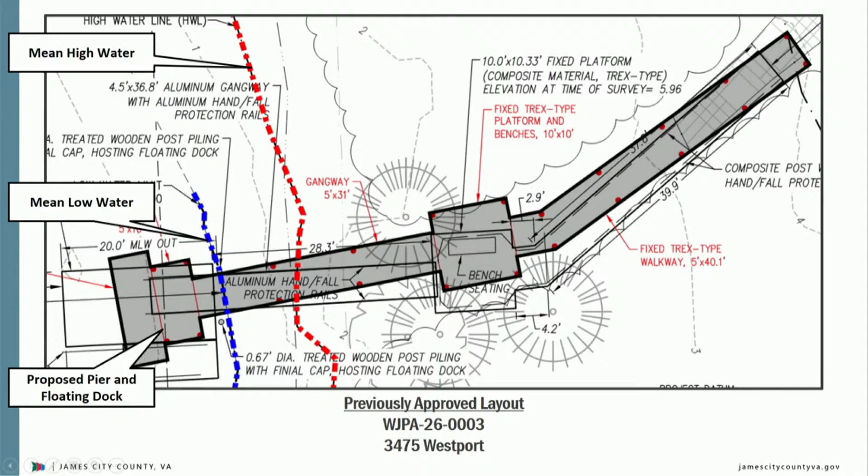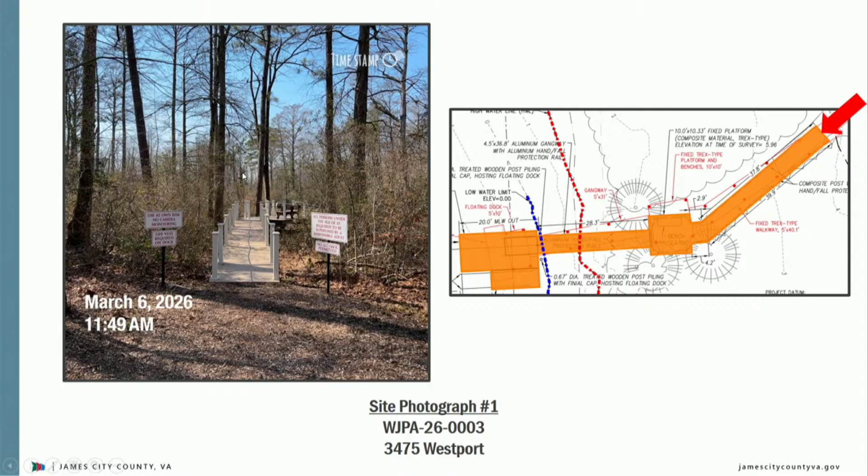This is the entryway, there's that gangway, moving a bit closer, railings extending outward, and then just a view from the corner kayak boat launch.

On February 1st, 2025, Virginia, as a Chesapeake Bay program partner, is committed to achieve a no net loss of wetlands. The following three criteria must be met: all reasonable mitigative efforts must be undertaken, and the proposal must demonstrate clearly its need to be in the wetlands, satisfying all three criteria.

However, compensation for the wetland loss is required. The committee is responsible for mitigation through offsite or out-of-kind mitigation within the same watershed. If compensation is required, it should be a condition of the permit, with no additional conditions. If you have any questions, I'd be happy to take them.

The as-built versus the portion that's within our jurisdiction shows a slight deviation. It's from the applicant.

President of Roth Environmental, 700 Prescott Circle, Newport News, Virginia, approved through the Wetland Board. The deviation that occurred was in order to not impact the three cypress trees there, in the same direction generally, as far as the gangway over the sliver that it hangs over, and then out beyond. Brad Reams reviewed this and they've recommended approval.

That increase in area out over. Any questions from the public regarding this? From the board? Chairman, this seems fairly straightforward, just a slight field adjustment for me.

Motion to adopt the resolution to grant the permit request for Wetlands Board case number WJPA. Mr. Roadley, yes. Mr. McElroy, yes. Mr. May, yes. Ms. Bowie, yes. Mr. O'Brien, yes. Motion passes.

Motion request. Ms. Grosjean: originally granted on June 14th, 2023. Staff's extension is to have the new expiration date coincide with that of WJPA. No objection from staff. I'll entertain a motion to approve the permit extension, case 013 at 5030 and 5032 River Drive. Mr. O'Brien, yes. Motion passes 5-0.

Ms. Grosjean, one more item: a modification to WJPA is requested regarding the Resource Protection Area Restoration Planting Plan, with the associated surety amount to be $5,200. If there are no objections, I'll entertain a motion for case 250011 at 7236 Otey. Ms. Bowie, yes. Mr. O'Brien, yes. Motion passes 5-0.

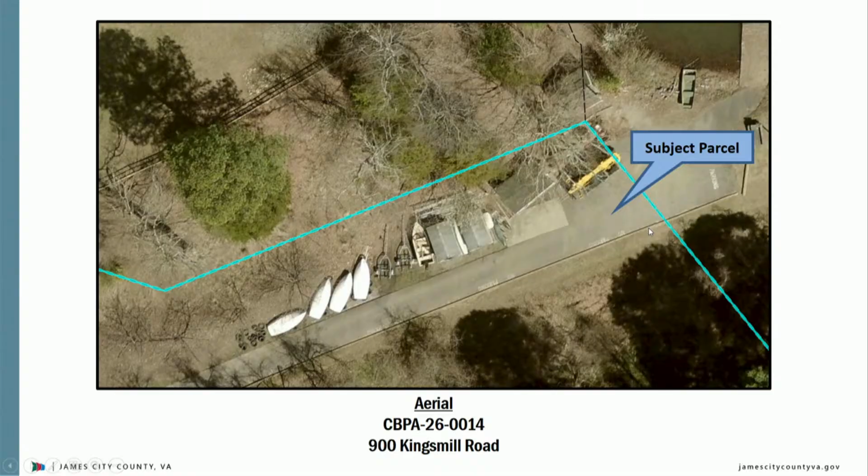Kingsmill Road. Amanda, Mr. Robert Thompson of William and Mary, installation of 2 sheds located at 900 Kingsmill Road within the Kingsmill subdivision, approved in 2004. Looking closer at the aerial project area, the total lot size of this property is 191.39 acres, of which 20% is located within the RPA. Impacts associated with this proposal equate to 2 understory trees and 3 shrubs.

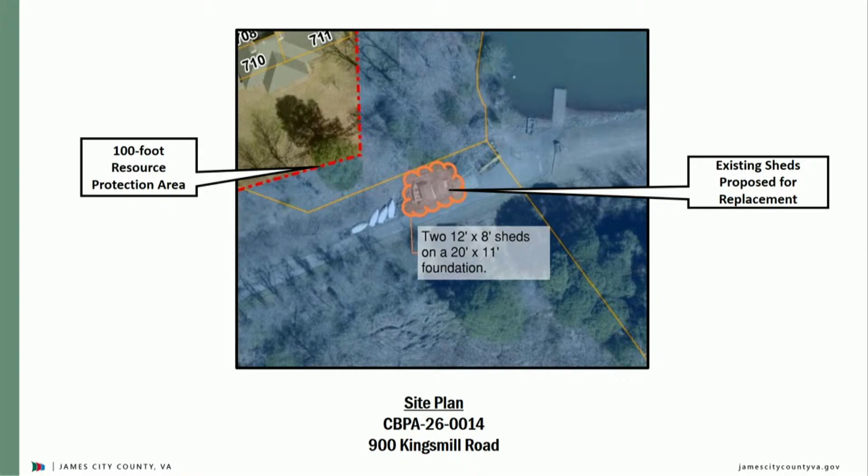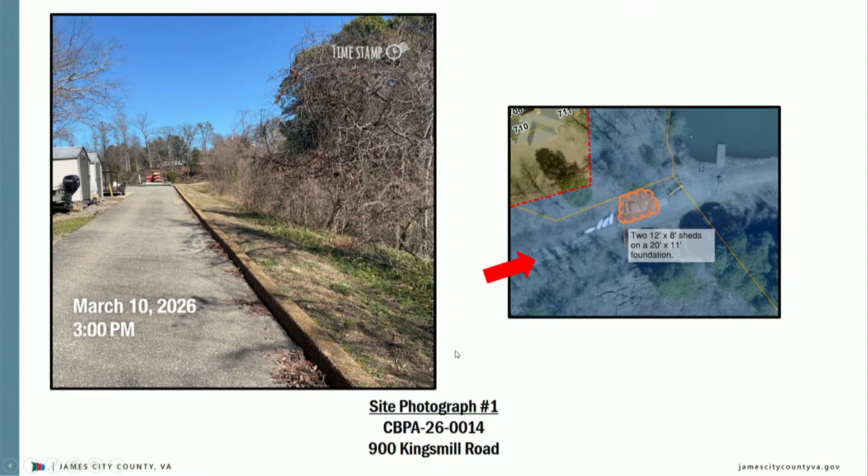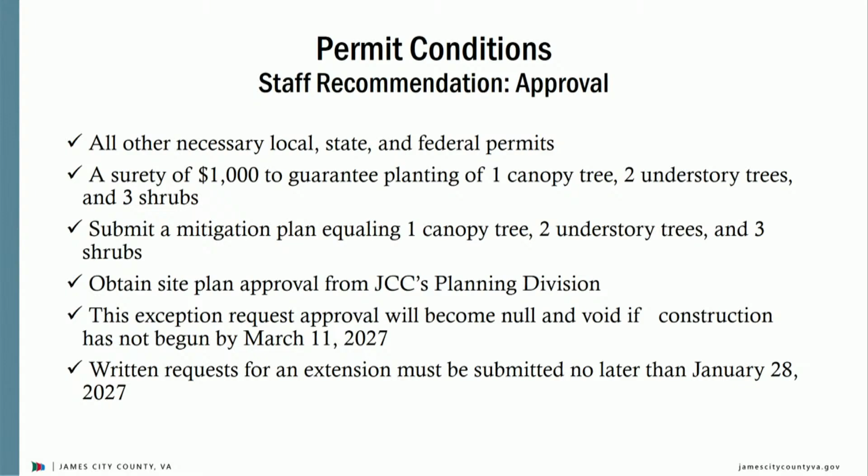Hearing none, I'll pull it back to the board. Any further discussion? Close the public hearing. Do I have a motion?

Motion regarding case 26-0014 at 900 Kingsmill Road. Mr. Wilson? Yes. Ms. Roadley? Yes. Motion passes 5-0.

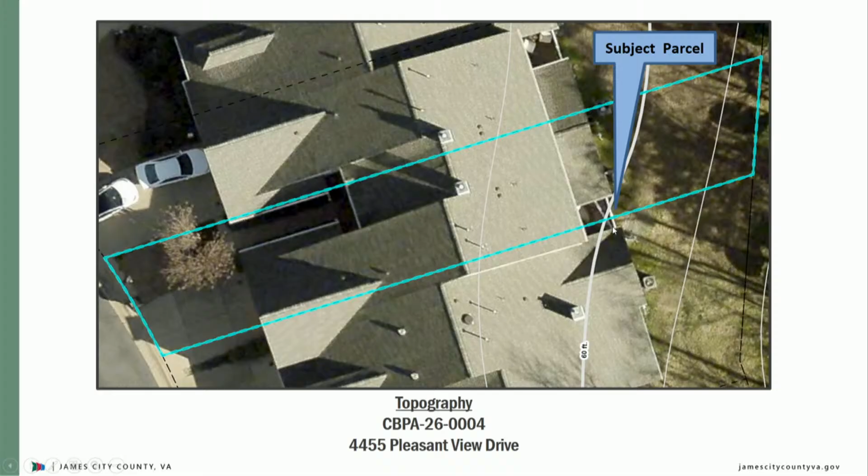Next item on the agenda is CBPA 26-0004, a motion for encroachments into the RPA buffer for the extension of a deck located at 4455 Pleasant View Drive. Subject parcel shown in blue, which we will zoom in on. As you can see, it slopes off to the rear right portion of the property in the landward buffer.

An 80 square foot raised deck at the back of the home will be extended by an additional 328 square feet. Required mitigation for this amount of impervious impact equals 1 planting unit of physical plantings.

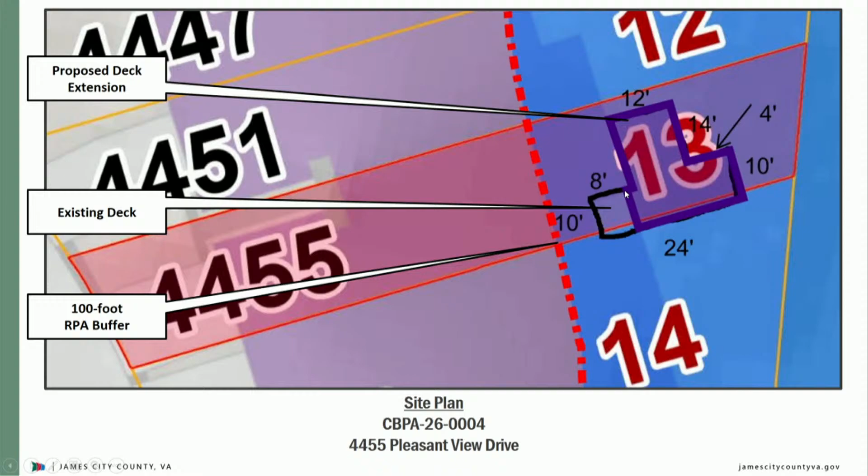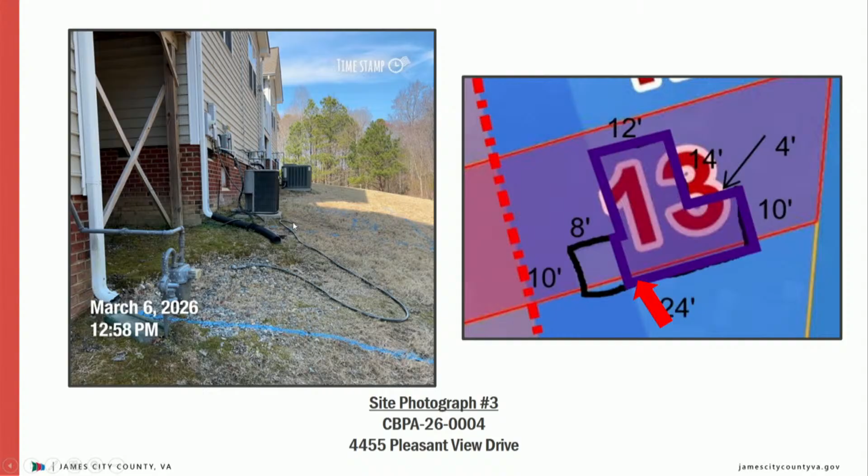The proposal does not encroach on anyone else's property, which they don't plan on doing. Moving through the current site photos here, showing the property line, then moving closer in to where it's going to connect, over to the proposed deck extension.

Staff has evaluated the construction of a deck as accessory in nature. The board may grant exceptions to section 23-7 if the proposed development meets requirements. Staff recommends approval for this exception request, and if the board permits, the applicant must obtain all necessary permits and submit a payment of $500. This exception request approval will become null and void if construction is not begun by March 11, 2027, the expiration date. Happy to take questions at this time.

Any questions for staff? Regarding the surfacing, it's some sort of crushed gravel or mulch — we're kind of leaving it vague. Anything that's disturbed has to be permanently stabilized with either of those things.

Is there anyone here to address the board? Please state your name and address for the record.

Thank you for your time and consideration and for all your important work protecting the bay. The plan is to pull the deck in 1 foot inside the property line on both sides, to take care not to cause any disturbance, as little as possible, and to take care with the gutter and the water.

For this unit, there are decks that do extend off of the back of the property. The neighboring property owner works in urban and environmental planning, and she's just expressing her perspective. Thank you very much.

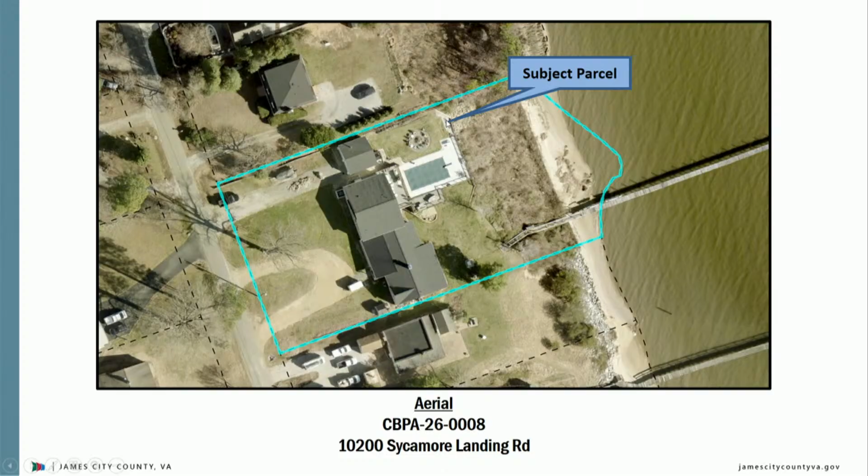Proposal involves a wall behind the existing dwelling to stabilize the yard above, with an existing retained area within the 100-foot RPA. Required mitigation for this amount would satisfy county mitigation requirements. The previously existing wall is proposed to be replaced.

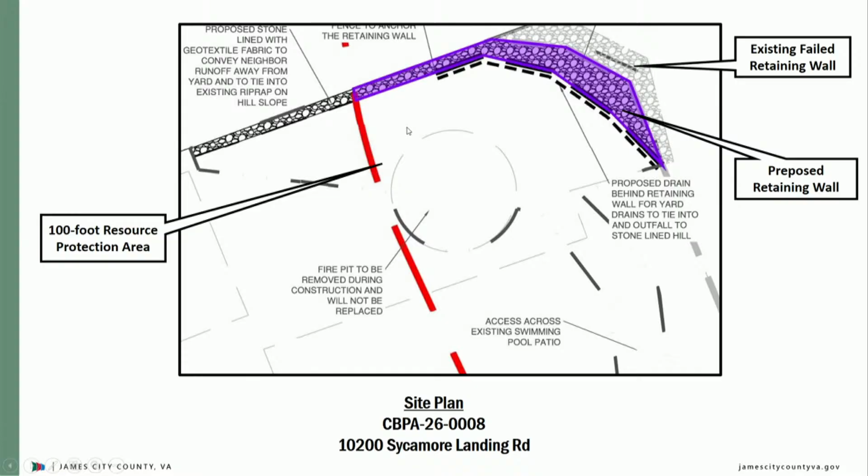Not reconstructed — this is the proposal section of the retaining wall, showing the existing structure here and the new construction here.

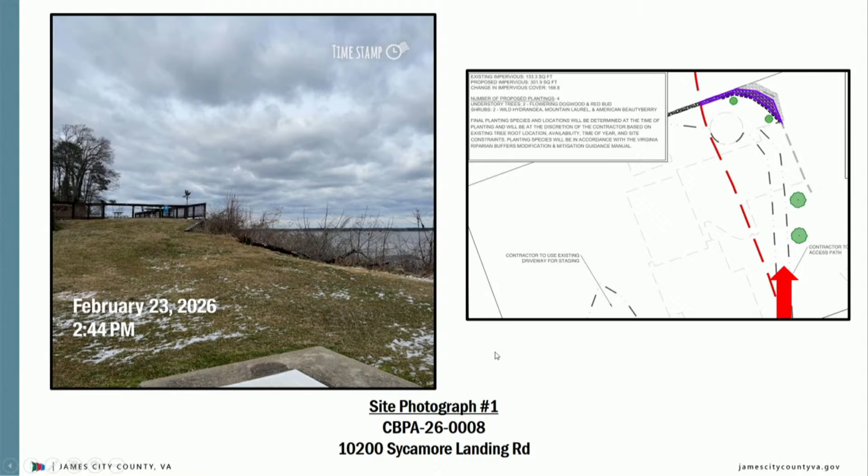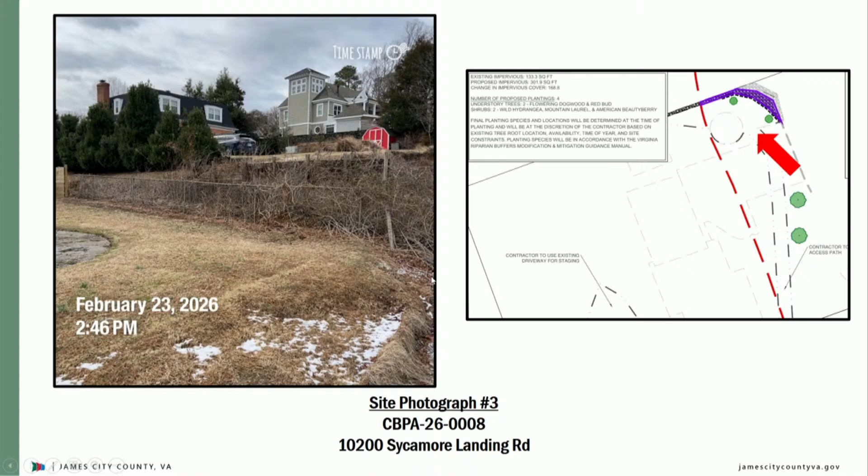Site photos show where the 2 understory trees are proposed, the previously existing fire pit, and then looking back towards the beginning of the retaining wall, along this fence and around this area, the existing failed retaining wall, and then the slope behind it.

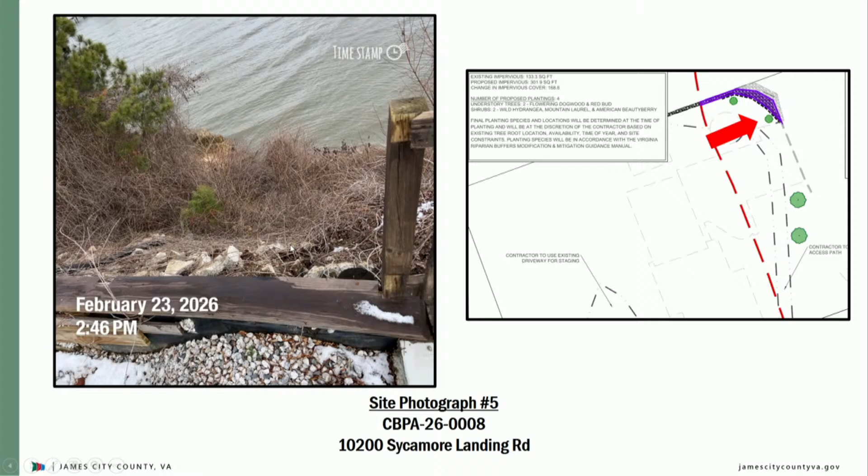Staff has evaluated the application and exception request for the construction of a retaining wall. This application meets the ordinance conditions in sections 23-11 and 23-14 and should be heard by the board because the construction of a retaining wall is considered accessory in nature.

The board may grant exceptions to section 23-7 if the application meets the following 5 conditions, which you have before you. Staff has reviewed the application and exception request and has determined the impacts associated with the proposal to be minor for the proposed development.

Staff recommends approval for this exception request, and if the board wishes to approve, staff recommends the following conditions be incorporated into the approval: the applicant must obtain all other necessary federal, state, and local permits as required for the project.

The applicant must submit a surety of $500, in a form acceptable to the James City County Attorney's Office, to guarantee the mitigation plan equaling 2 understory trees and 2 shrubs. This exception request approval will become null and void if construction has not begun by March 11th, 2027.

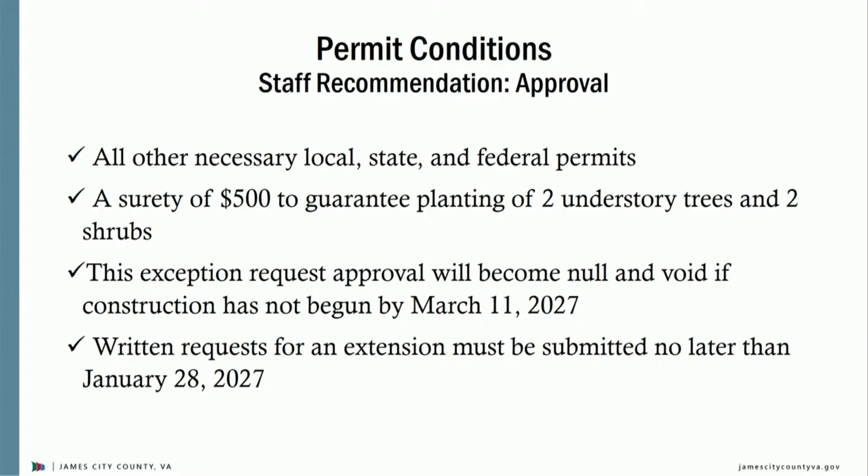Written requests for an extension to an exception must be submitted to the SRP division no later than January 28th, 2027, 6 weeks prior to the expiration date. Happy to take any questions at this time.

Questions for staff? It was indicated the existing retaining wall is going to stay there — does that provide any benefit? I will defer that question to the applicant. Other questions for staff? Could you go back to the cross-section drawing of the proposed structure?

They're retaining the existing structure; the soil will be removed and replaced, or removed and left out of there. That's for the applicant to address.

Okay, and these are horizontal alignment of the boards for the retaining wall, as opposed to being driven? Okay, that's for the applicant. I don't have any more questions then.

Thank you. With that, I'll open the public hearing. Would the applicant care to address the board?

Hello, Karen Hall, 7501 Mill Trail Road, Charles City, Virginia. Can you repeat your questions? I'm happy to answer them.

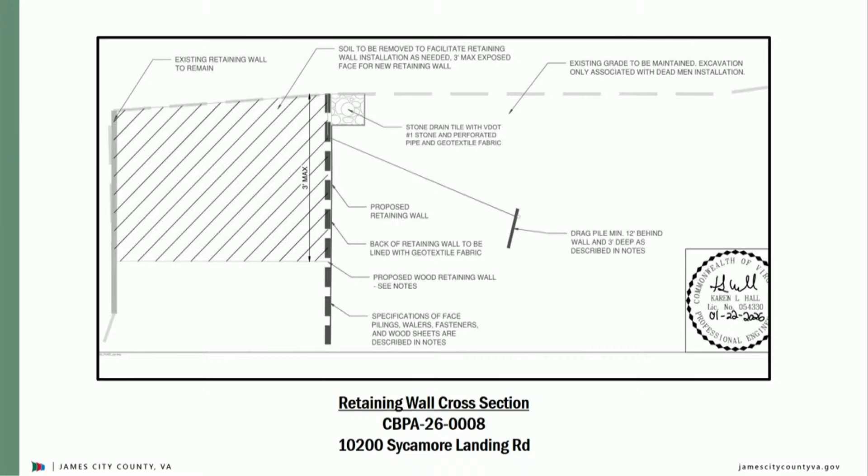Sure, so is the fill that's being removed going to be replaced? It's not anticipated to be replaced. The reason the existing retaining wall is to remain is you saw how sheer that slope is, just to avoid any disturbance on that side of the wall and pulling anything out to disturb it further was the intent, but the existing wall has failed. So will that area just be revegetated?

I think I showed proposed riprap on the downslope side of the proposed wall, so even though that existing retaining wall has failed, there'll be nothing but riprap cover there to facilitate any drainage that comes through there.

And then the structural alignment of the boards, are they horizontal or vertical? They'll be vertically driven into the soil. Okay, and you can see on the profile that the boards go further down into the soil there, so.

And is the surface drain, you think, enough to keep the hydraulic head from impacting the wall? I think so. We evaluated a drop inlet, but it seemed excessive for what was going on there.

Any further questions? Thank you very much. Would anybody else care to address the board on this matter? With that, I will pull the discussion back to the board.

Seems to have an issue that they're wrestling with. The stone does make the area of encroachment a little bit wider as it's shown on the plan view, which helps clarify for me why we were showing such a large area, but that's all behind where the existing wall is now, correct? Yeah.

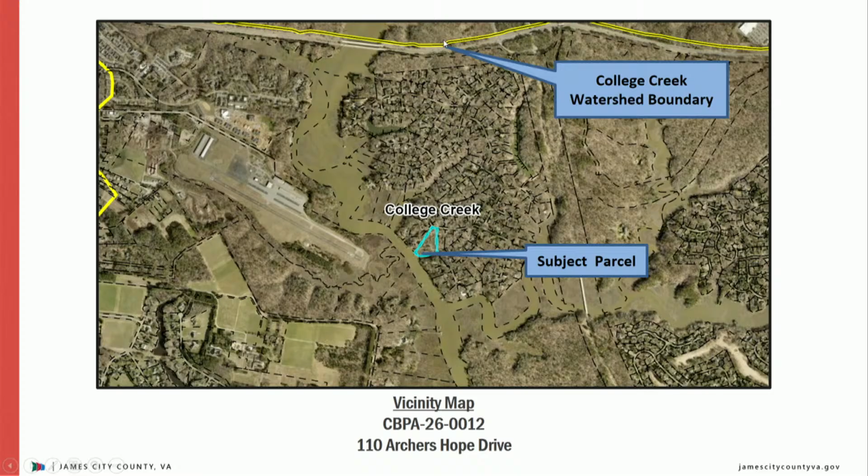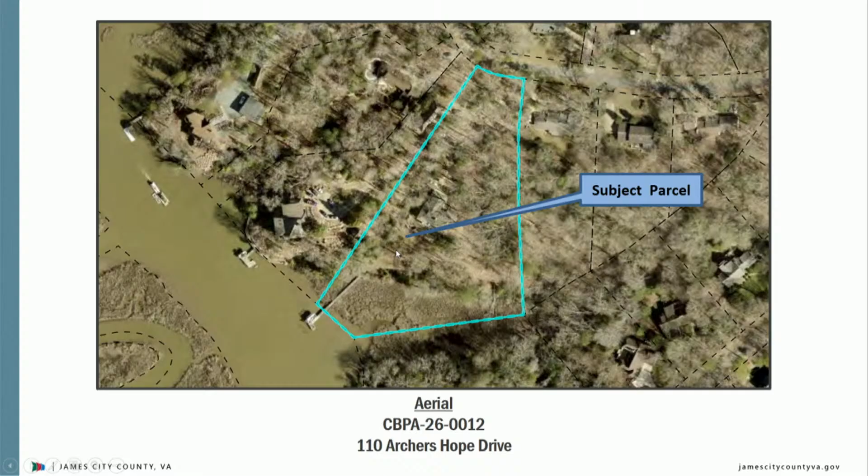We have that subject parcel, as usual, outlined in blue, along with that watershed boundary outlined in yellow. Moving further into recent aerial photography, you can see an existing dock, and this is the area of focus for the proposal, along with the existing topography, as you can see it kind of just slowly slopes back towards the rear of the property, towards the water.

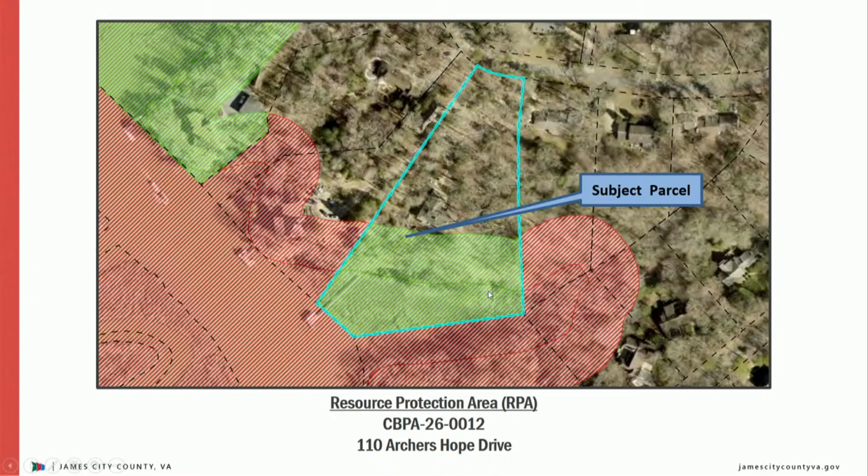And then the current RPA buffer, along with the FEMA floodplain, which is zone AE with a base flood elevation of 7 feet. The total lot size of this property is 3.056 acres, of which 52% is located within the RPA. The parcel was platted in 1973, prior to the adoption of the Chesapeake Bay Ordinance in 1990.

The applicants are proposing to construct 2 retaining walls, stairs, and a walkway. Total impacts to the RPA associated with this proposal equate to 411 square feet of impacts in the landward 100-foot RPA, and 395 square feet of impacts in the seaward 50-foot RPA, for a total of 806 square feet of total impacts to the RPA.

Required mitigation for this amount of impervious impacts equals 2 planting units, or 2 canopy trees, 4 understory trees, and 6 shrubs. The applicants have proposed a mitigation plan equaling 2 understory trees and 55 shrubs. This exceeds the county's mitigation requirements.

So we have the site plan here before you. All of the proposed work to take place within the 100-foot landward buffer is outlined in purple. If you look at these little dots, they're a landscape feature, basically big boulders. We wanted to account for those impervious impacts, as well as the retaining wall, along with the stairs and walkway, which continues into the seaward RPA buffer outlined in orange, with stepstones that go up to that existing dock.

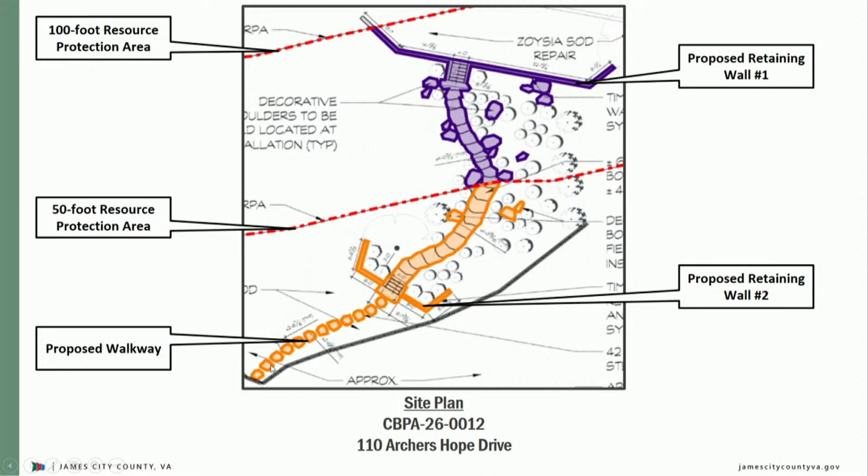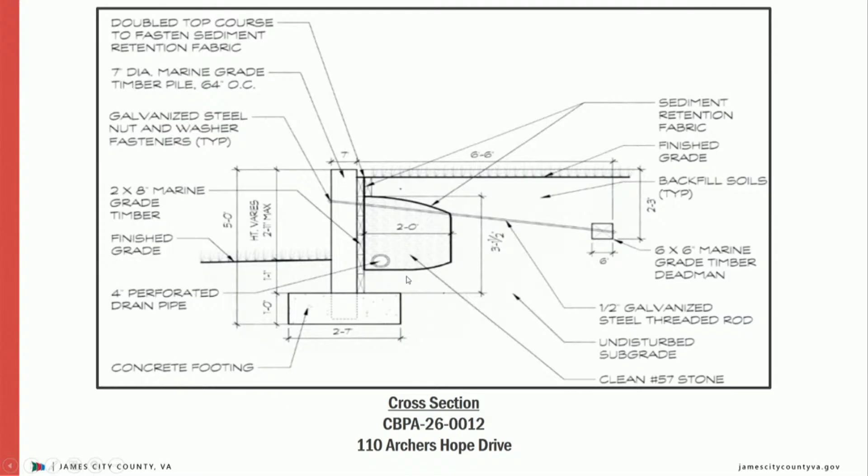This is a cross-section of those proposed retaining walls. We have a deadman tieback here, with stabilization proposed along the top and bottom of both retaining walls. And then the mitigation plan with those 2 understory trees along with various native shrubs, all shown in green here.

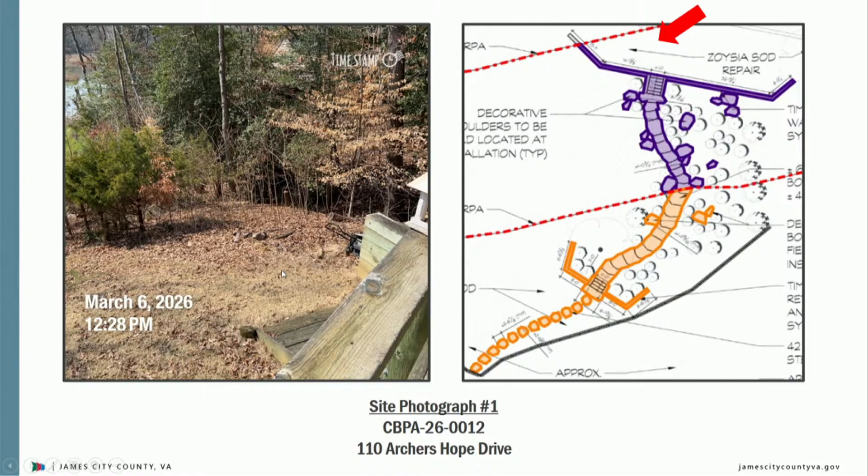And then just some recent site photography showing existing conditions on the site. There is a 3rd existing retaining wall towards the top of the house, cut off right about here in this screenshot. So standing from the top of that, just to give you an idea of where that 100-foot RPA buffer starts, as well as the extent of that first proposed retaining wall, and then moving down, looking at the alignment of where that first retaining wall will go.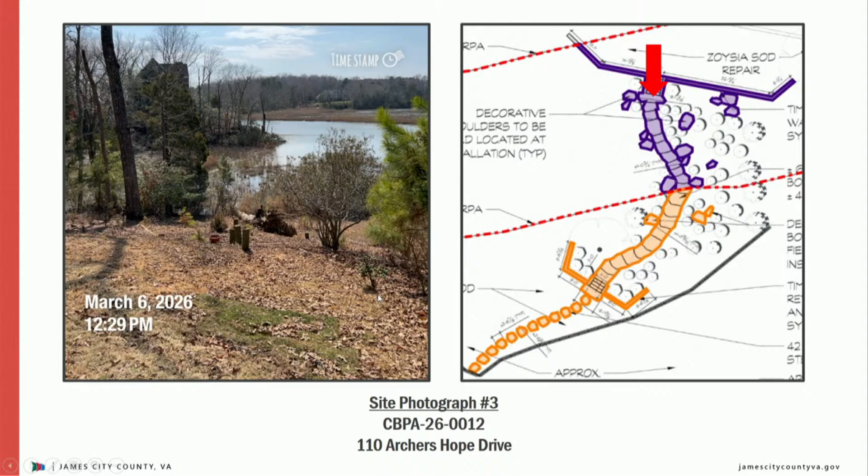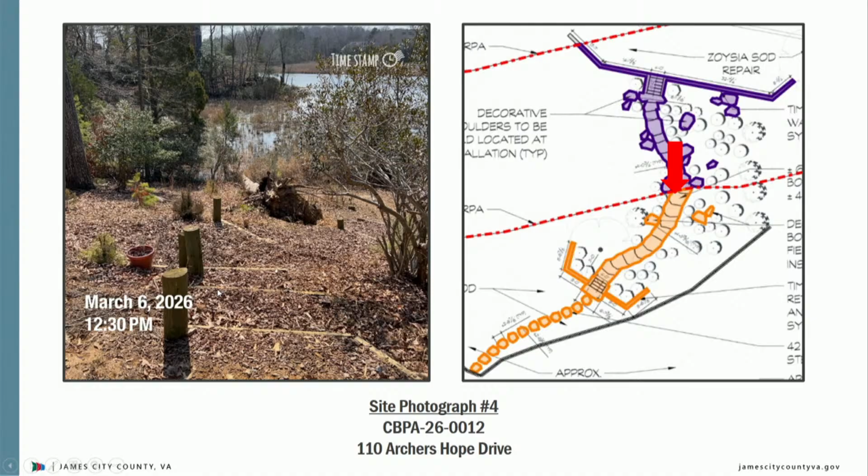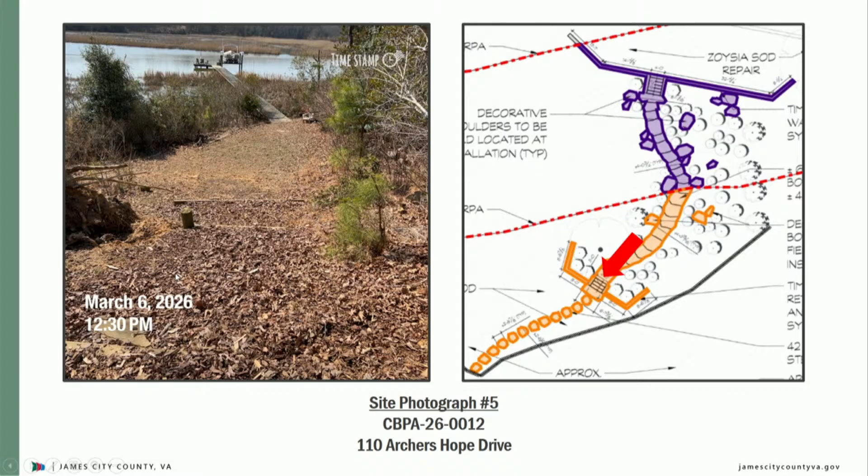And it gives you an idea of the slope on the property. Looking more directly towards the water, following that proposed path, there's sort of an existing one, but as we go through these photos, you'll see the existing condition of it. Just moving closer on those stairs, following the current proposed pathway, we're about to go into the 50 seaward here, and then moving further in, there's that existing dock with the stepstones that'll be proposed here. This is about where that second retaining wall in orange will be placed.

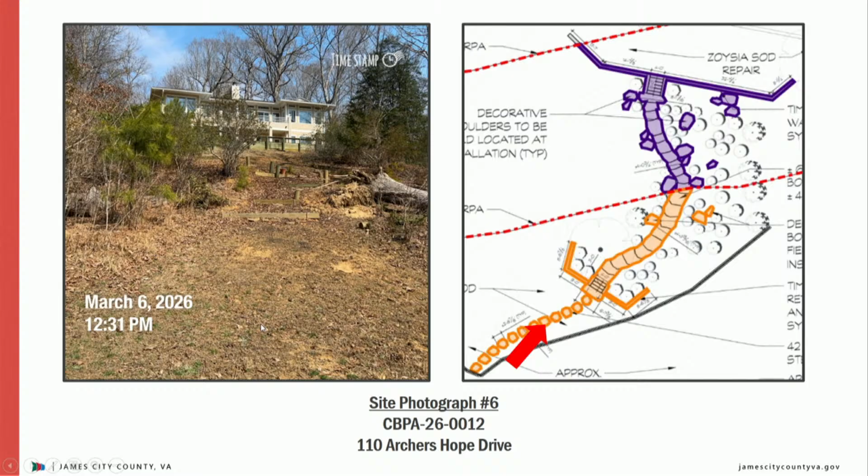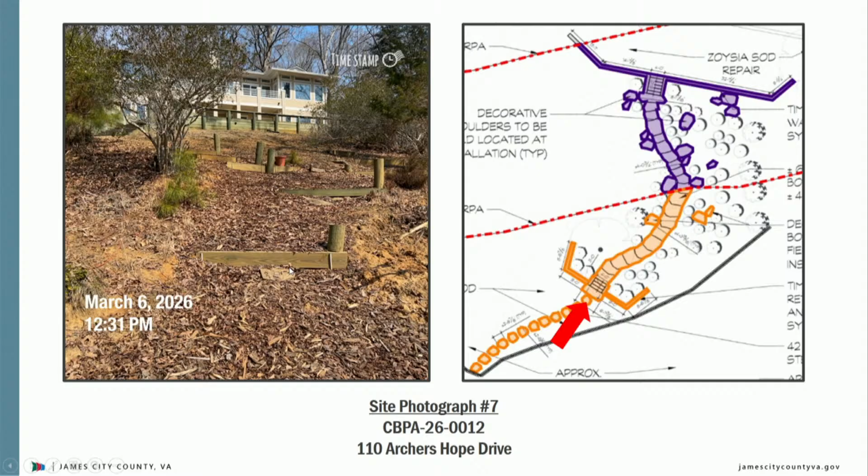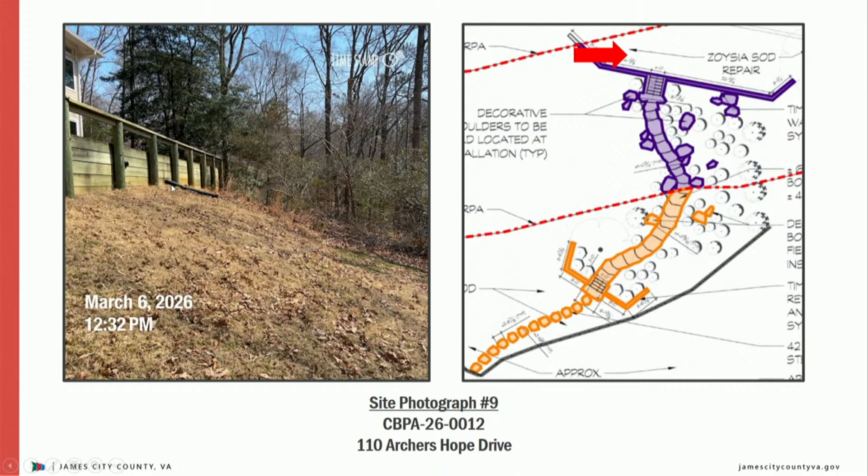Staff has evaluated the application and exception request for the construction of 2 retaining walls, stairs, and a walkway. This application meets the ordinance conditions in sections 23-11 and 23-14 and should be heard by the board because the construction of retaining walls, stairs, and a walkway is accessory in nature. The board may grant exceptions to section 23-7 if the application meets the following 5 conditions outlined before you.

Staff has reviewed the application and exception request and has determined the impacts associated with the proposal to be moderate for the proposed development. Staff recommends approval for this exception request, and if the board wishes to approve that request, staff recommends the following conditions be incorporated into the approval.

The applicants must obtain all other necessary federal, state, and local permits as required for the project. The applicants must submit a surety of $3,750 in a form acceptable to the James City County Attorney's Office to guarantee the mitigation plan equaling 2 understory trees and 55 shrubs. This exception request approval will become null and void if construction is not begun by March 11th, 2027, and written requests for an extension must be submitted to the SRP division no later than January 28th, 2027, which is 6 weeks prior to the expiration date.

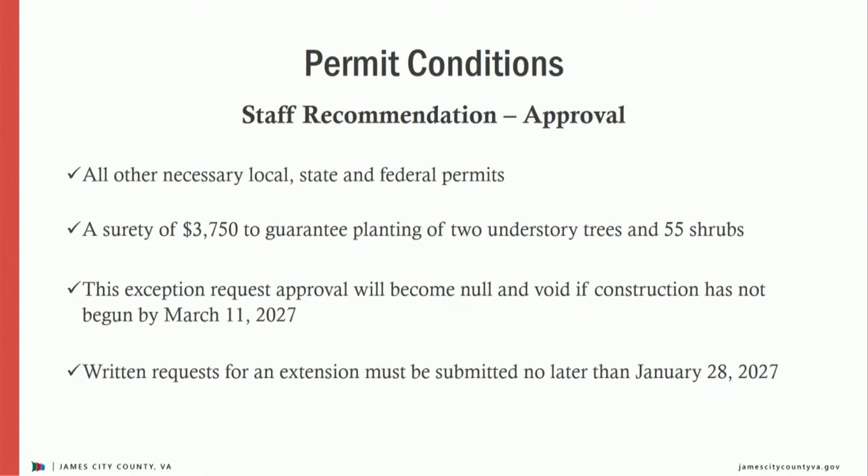If you have any questions, I'd be happy to take them at this time. Questions for staff?

Fairly well presented, thank you. I'll open the public hearing. Would the applicant care to address the board?

How you guys doing? Good. Please state your name and address for the record.

My name is Mitch Foose. I'm the owner of the King's Garden, and this is Sarah Lamb, she's the designer. Basically the hillside is eroding, it's all open soil, so we're proposing retention walls to lessen the slope and mitigate the erosion. We're trying to create a pathway for the owners to safely get down from their house to the dock. We're going to be doing a lot of mitigation planting to hold the hillside down, along with the inclusion of boulders so that those can be dug into the hill and act as stabilization as well.

In addition to the stepping stones, is there mulch applied as well? I noticed they had some mulch down now. So there will be mulch applied in the middle of the 3 sections. The top section above the first retention wall is going to be zoysia sod, and the lower section where the stepping stones go from the lower retention wall to the dock is also going to be zoysia sod.

What's the elevation of the retaining walls? Less than 3 feet on the top one, just a little under 3 feet, and the bottom one should be about 2.5 feet. Step down from those, from the walkway, through some steps, or just?

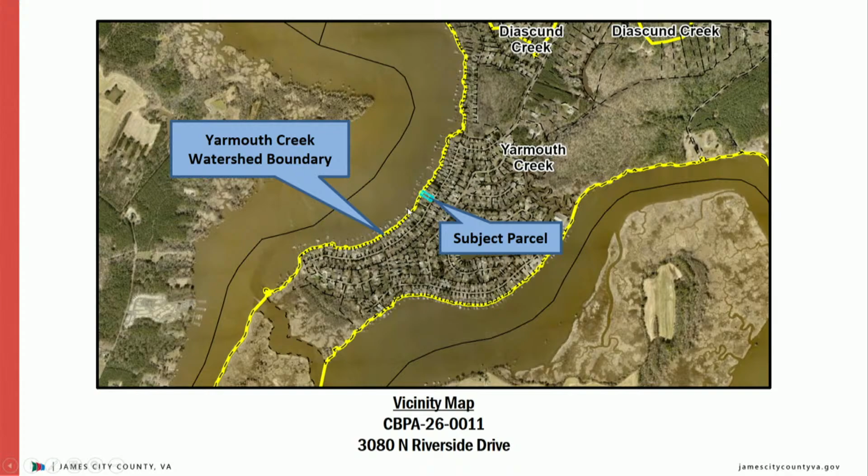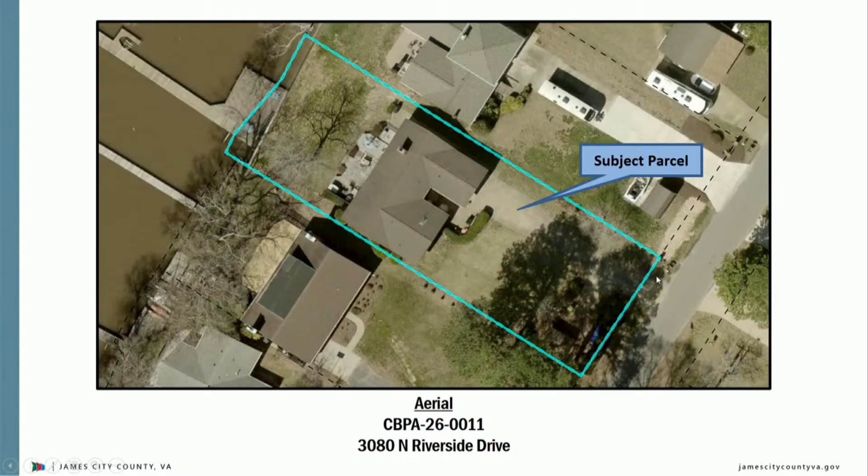The total lot size of this property is 0.395 acres, of which 48% is located within the RPA. The applicant is proposing to construct an in-ground pool and is proposing to remove existing decks and a pump house structure within the RPA. These existing structures equate to approximately 764 square feet of existing impervious within the 50-foot landward RPA and approximately 80 square feet of existing impervious within the 50-foot seaward RPA. The applicant is proposing to construct a 1,440 square foot in-ground pool and pool deck behind the existing dwelling where the existing decks are currently located.

Total new impacts to the RPA associated with this proposal equate to approximately 116 square feet of new impacts to the landward 50-foot RPA, approximately 496 square feet of new impacts to the seaward 50-foot RPA, for an approximate total of 612 square feet of new impacts to the RPA. Required mitigation for this amount of impervious impacts equals 1.5 planting units: 1 canopy tree, 2 understory trees, and 9 shrubs. The applicant has proposed a mitigation plan of 2 canopy trees, 4 understory trees, and 6 shrubs, thus exceeding the county's mitigation requirements.

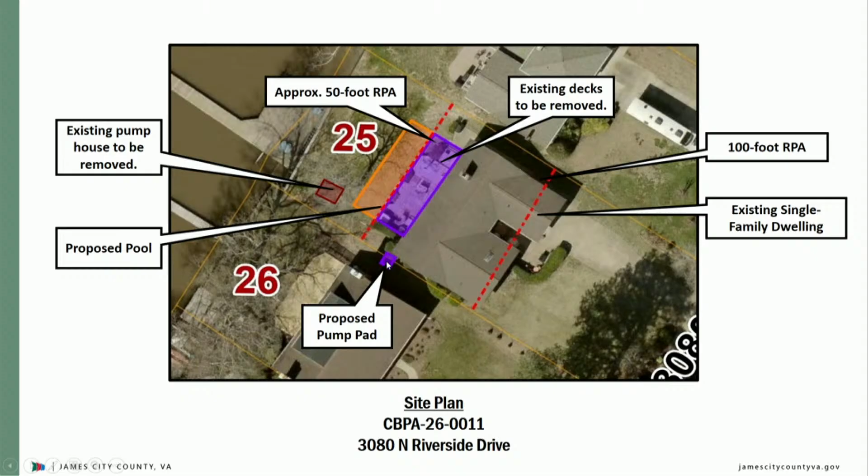Here we have a site plan showing the limits of the proposed pool and deck. This area here in purple includes the existing deck and where the new impervious will be proposed in this area, and then it will extend into the 50 seaward here. This is the existing pump house that is proposed for removal and the proposed pump pad for the pool. This was the submitted mitigation plan with the mitigation plantings on the side of the property line.

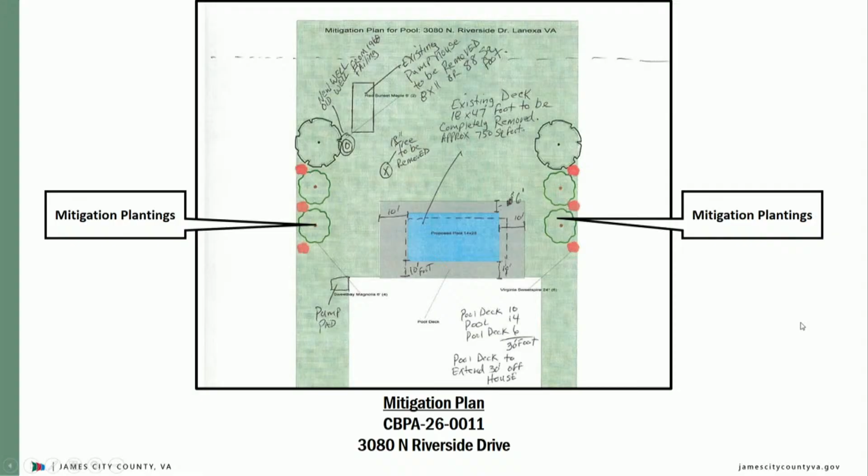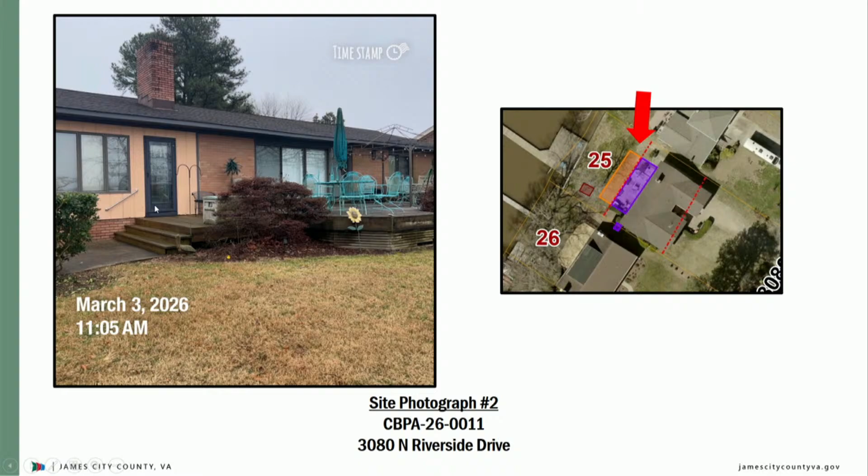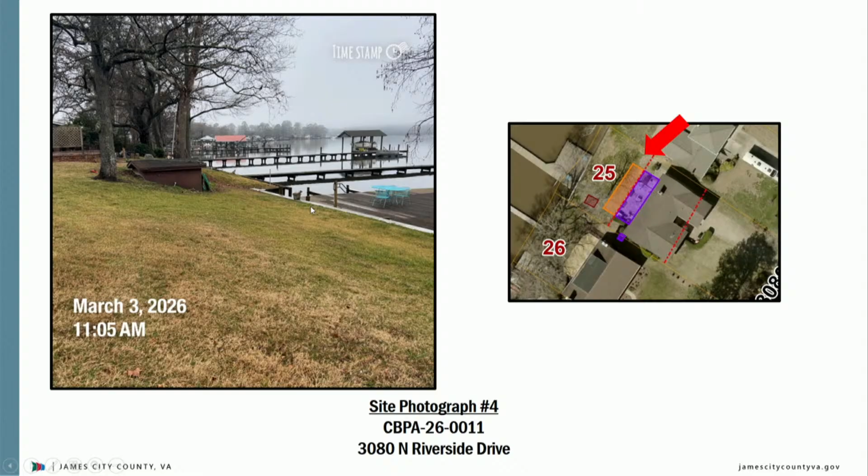Photographs of the site. Here we have the side yard going around to the back, the existing decks, showing the rest of the existing decks, and then the area where the pool is proposed. I have some markers here and here showing the limits of the proposed pool and pool deck. And then looking back downslope towards the water, and looking back towards the existing deck and the limits of the proposed pool.

Staff has evaluated the application and exception request for the construction of an in-ground pool. This application meets the ordinance conditions in sections 23-11 and 23-14 and should be heard by the board because the construction of a pool is considered accessory in nature. The board may grant exceptions to section 23-7 if the application meets the following 5 conditions, which you have before you.

Staff has reviewed the application and exception request and has determined the impacts associated with the proposal to be major for the proposed development. Staff finds the current proposal to be excessive and more than necessary to afford relief.

However, if the board wishes to approve the request, staff recommends the following conditions be incorporated into the approval. The applicant must obtain all other necessary federal, state, and local permits as required for the project. The applicant must submit a surety of $2,000 in a form acceptable to the James City County Attorney's Office to guarantee the mitigation plan, equaling 2 canopy trees, 4 understory trees, and 6 shrubs. This exception request approval will become null and void if construction has not begun by March 11th, 2027.

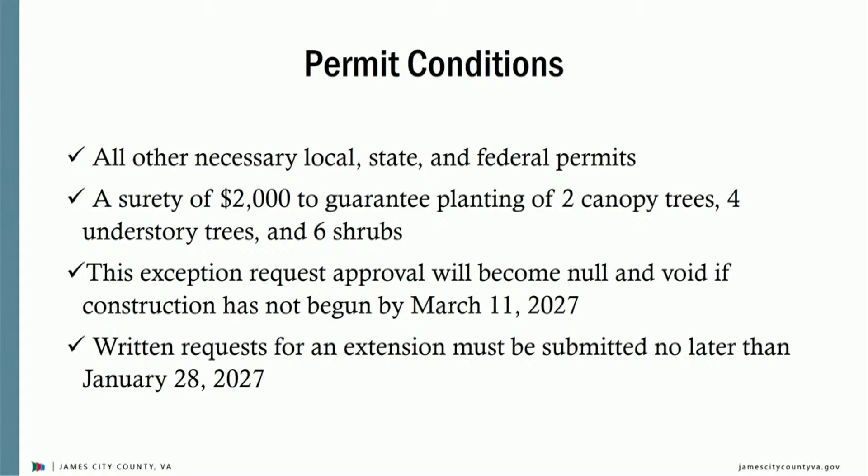Written requests for an extension to an exception must be submitted to the Stormwater and Resource Protection Division no later than January 28th, 2027, six weeks prior to the expiration date. Any questions for staff?

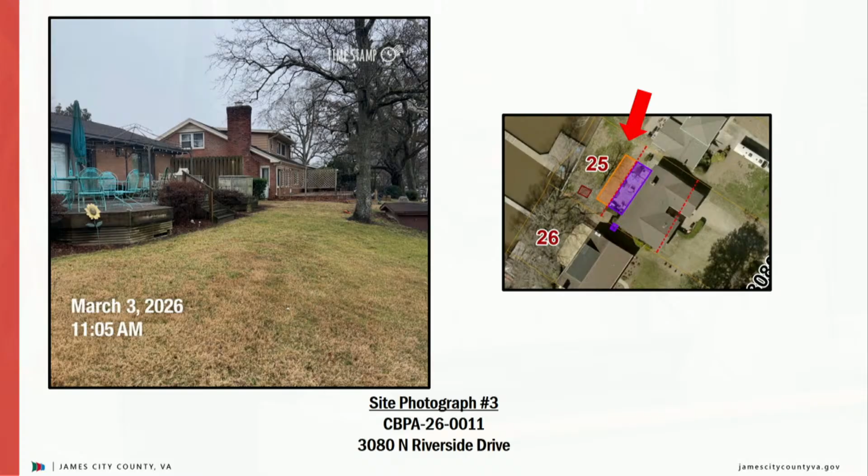Could you go back to your site photos? Okay, so where your tape is located is the approximate corner, based on field measurements, so that tree's going to be removed. We're not provided with a plan that states that. However, it'll be removed or die, either one, because you're going to chop through the roots, I would think. I think there was a note in that sketch that said a 16-inch tree to be removed. Was that in the sketch? Oh, I see, it's an 18-inch tree to be removed. Thank you.

Gradual slope down to the bulkhead. That's a fair assessment. There you go.

Pump house, what is that associated with currently? I will defer that to the applicant.

Any other questions for staff? Thank you very much. I will open the public hearing. Would the applicant care to address the board?

Could you state your name and address, please? Scott and Kim Grimes, 3080 North Riverside Drive, Chickahominy Haven.

We didn't come to the decision to put a pool in lightly, but the water quality in the river is such now, we can't swim in it anymore. In June and July, with the old septic tanks in the neighborhood and stuff like that, we struggle to swim in the summertime. I'd like to note that this lot does not flood at all. This board approved another pool, and we have a neighbor that has a pool, and this board approved it. They were 800 square foot in the impervious, and their lot is smaller, and we're only asking for 614.

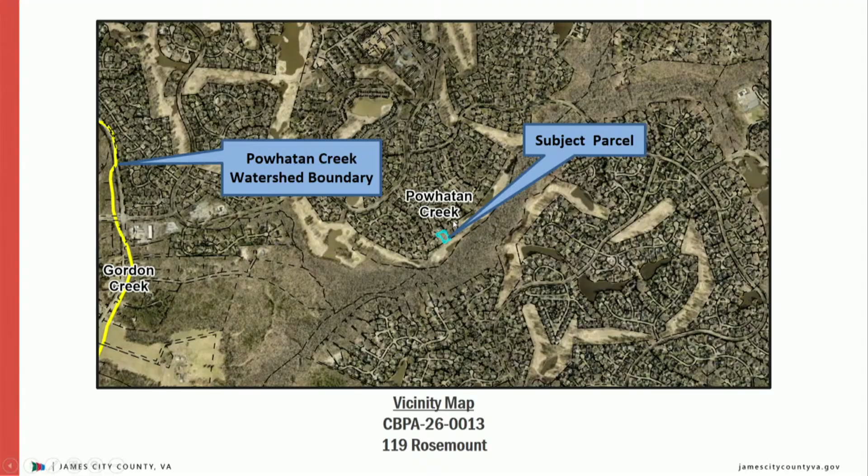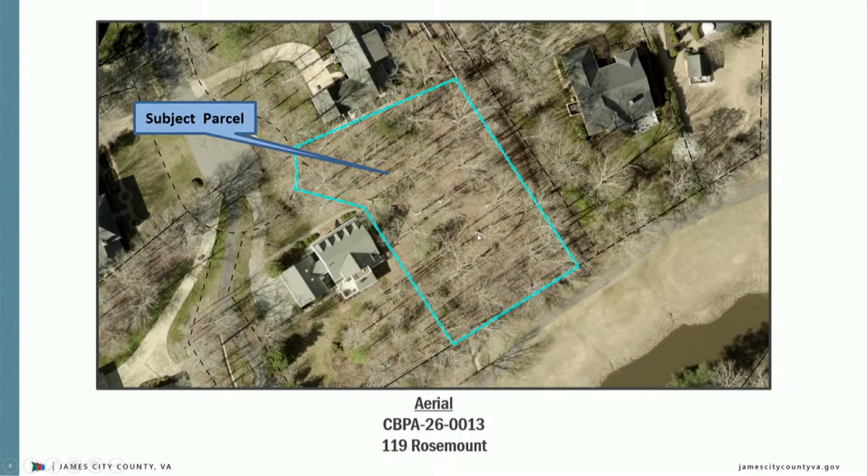The parcel was platted in 1985 prior to the adoption of the Chesapeake Bay Preservation Ordinance. We have the subject parcel outlined in blue here, along with the Powhatan Creek watershed boundary highlighted in yellow. Moving further into the parcel, we can see the existing aerial photography along with the existing topography, which is fairly flat.

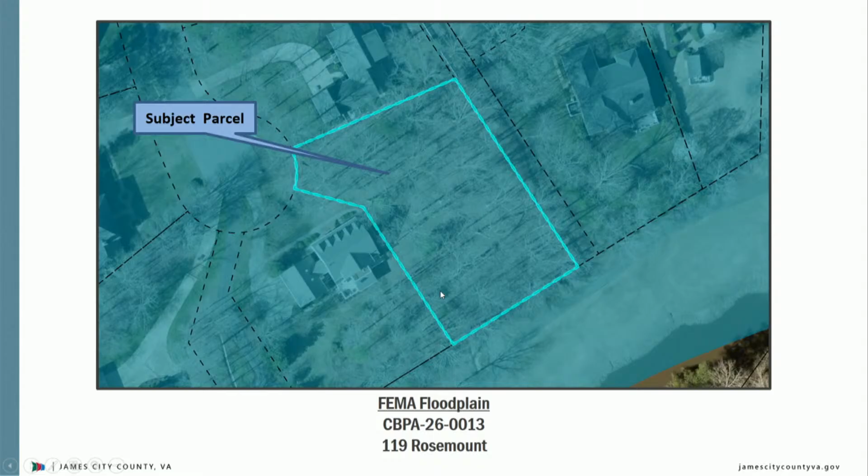The current RPA buffer: total lot size of this property is 0.573 acres, of which 98% is located within the RPA. We also have the FEMA floodplain, located in Zone AE with a base flood elevation of 7 feet. And then the current site plan.

The applicant is proposing to construct a single-family dwelling with a patio. Total impacts to the RPA associated with this proposal equate to 1,280 square feet of impacts to the landward 100-foot RPA, and 3,552 square feet of impacts to the seaward 50-foot RPA, for a total of 4,832 square feet of impacts to the RPA buffer. The maximum first floor square footage for a single-story home in this section of Ford's Colony is 1,500 square feet. This proposal has a first floor square footage of 1,533 square feet, a 2.2% increase.

Required mitigation for this amount of impervious impacts equals 12 planting units, or 12 canopy trees, 24 understory trees, and 36 shrubs. The applicant has proposed a mitigation plan equaling 12 planting units, specifically 2 canopy trees, 8 understory trees, and 108 shrubs. This meets the county's mitigation requirements.

Due to the environmental sensitivity of the lot, staff will be requiring the installation of a 6-foot chain link fence along the limits of wetlands prior to construction, and the recordation of an affidavit at the Williamsburg-James City County Courthouse prior to the release of surety. Additionally, denuded soil underneath the proposed screen porch must be permanently stabilized prior to the release of surety.

Here we have the overall site plan. The wetlands that have been recently delineated are in bright green, with the building setback in a square blue line. Everything within the 100-foot RPA buffer is outlined in purple, with the 50-foot seaward buffer outlined in orange. We have the proposed driveway and the single-family residence with the attached screen porch, along with stairs that lead to the proposed patio. This black buffer here shows the proposed limits of disturbance for the project.

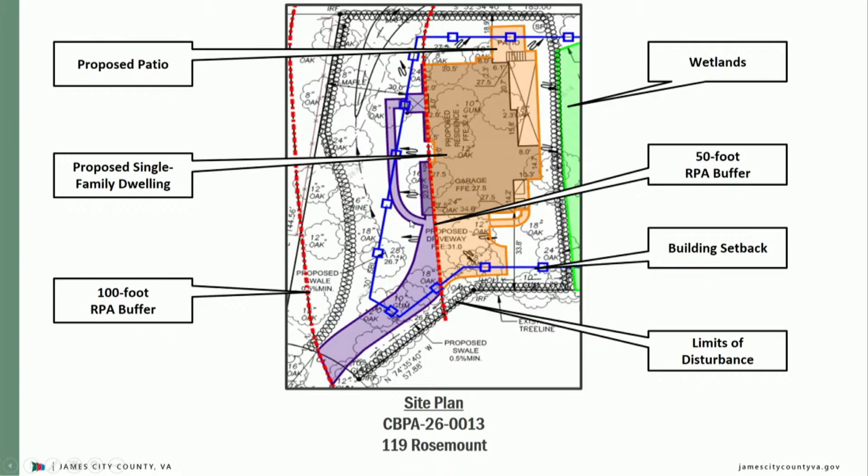As you can see, the reason for the 6-foot chain link fence is that they'll be clearing up to the limit of those wetlands, and we want to make sure no heavy machinery impacts the wetlands during construction. Moving closer into the limits of disturbance on the site plan, the proposed 100-foot buffer impacts are again in purple, and the 50-foot seaward in orange. Here is the proposed mitigation plan previously described in the staff report, outlined in green.

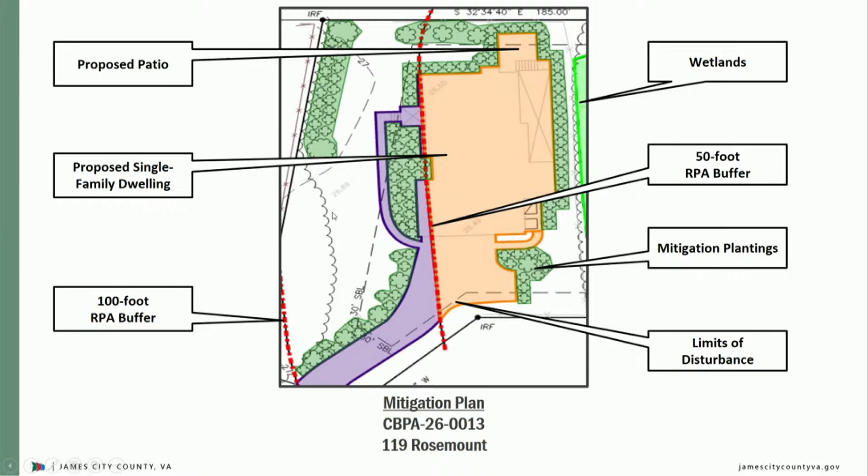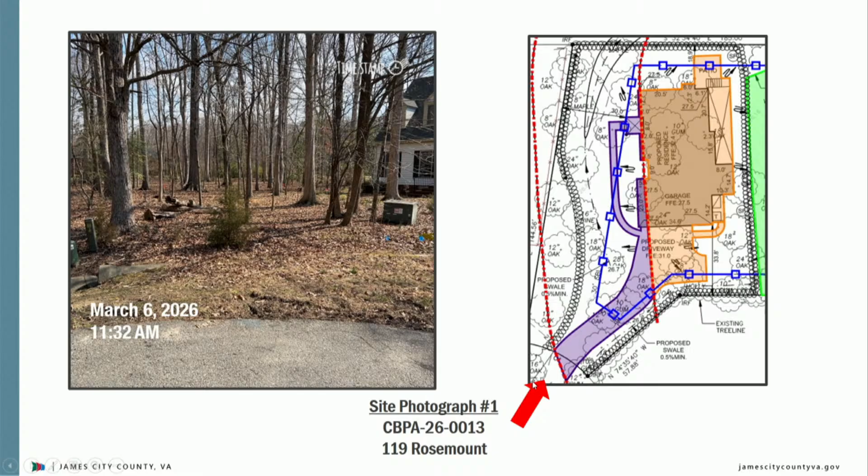Now some recent site photography, starting at the beginning of the driveway near the cul-de-sac. It's a little cut off by my screenshot, but moving forward, these are the rough corners of the house that have been staked out. This is standing in the proposed driveway, looking toward the front of the home, along the front where the walkway will go. That corner staked here is right about here, and moving to that stake, we look closer toward the other rough corner of the home located here.

You can faintly see it with the orange staking, but I have more photos showing that later. Turning to the right and looking up the side of the house to the other rough corner that's staked out. As we move closer to that stake, you can see the limit where the wetland line is, and the space between that corner of the house and the edge of the limits of clearing.

Turning to the left, looking at the extent of the house in the rear, part of the house comes out right about here, which extends to that screen porch. The other corner of the home is located down here. So moving to that...

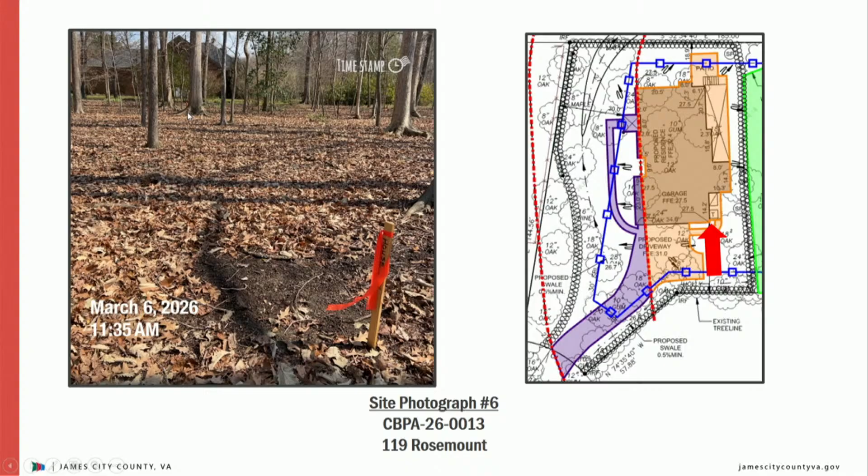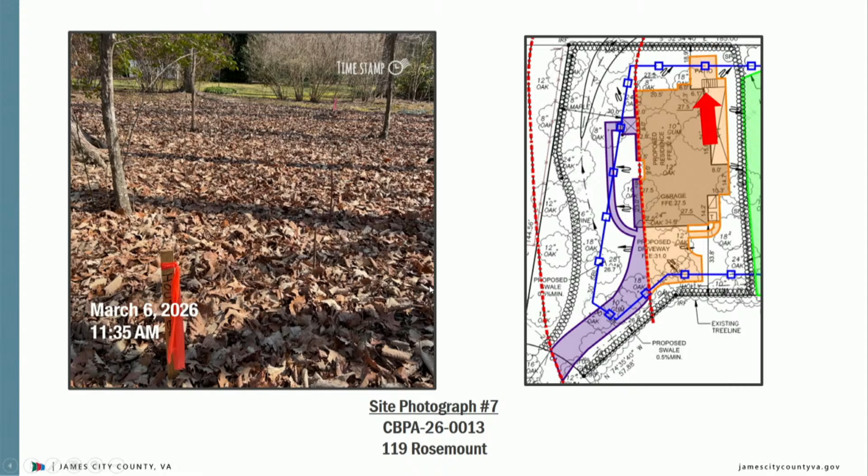This is showing the rear corner where that proposed patio will be placed, along with the stairs. Going from the other side, looking back up that rear portion of the home where the corner of the house is staked, again showing the limits of wetlands and the space between the LOD and...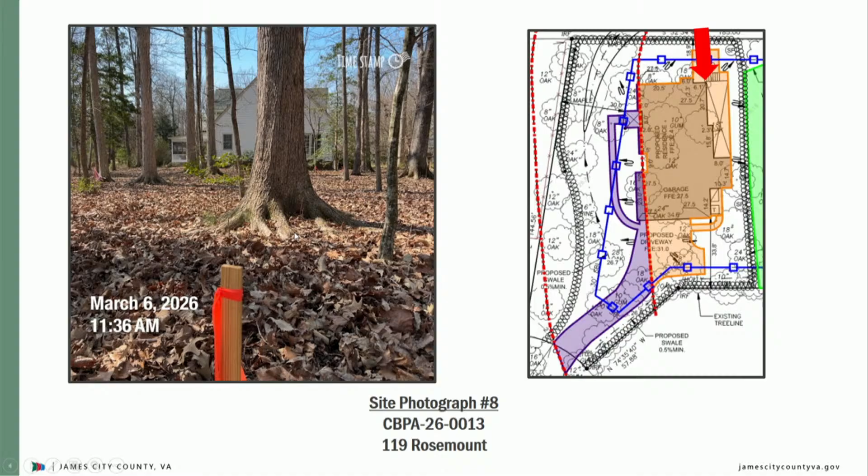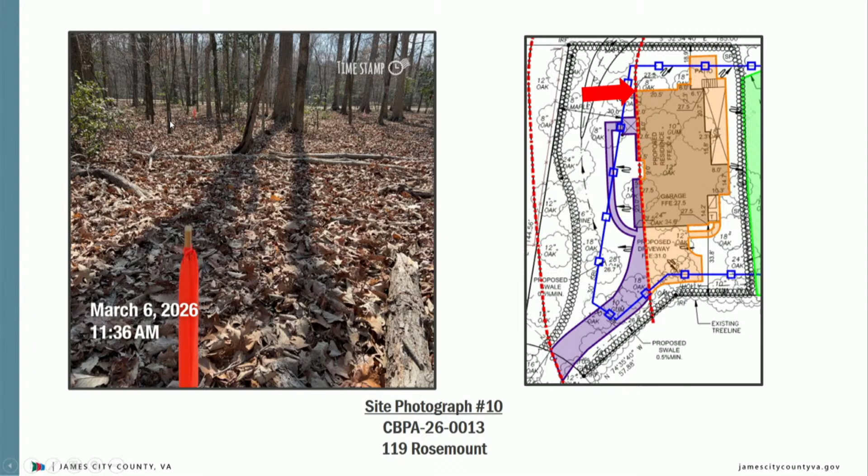Limits of disturbance and where that proposed portion of the house extends to. Looking again from that back corner down the side of the property line where the patio is to the front corner here. Looking back up that way to give you a better idea of where the corner of the home is and where that patio will come out on the side here.

Staff has evaluated the application and exception request for the construction of a single-family dwelling and patio. This application meets the ordinance conditions in sections 23-11 and 23-14 and should be heard by the board because the construction of a new single-family dwelling and patio in the seaward 50-foot RPA cannot be approved administratively. The board may grant exceptions to section 23-7 if the application meets the following 5 conditions outlined before you.

Staff has reviewed the application and exception request and determined the impacts associated with the proposal to be major for the proposed development. If the board wishes to approve the request, staff recommends the following conditions be incorporated into the approval. The applicant must obtain all other necessary federal, state, and local permits as required for the project.

The applicant must submit a surety of $6,000 in a form acceptable to the James City County Attorney's Office to guarantee the mitigation plan equaling 12 planting units, or 2 canopy trees, 8 understory trees, and 108 shrubs.

A 6-foot chain link fence must be installed along the limits of wetlands prior to the start of construction. Denuded soil underneath the proposed screen porch must be permanently stabilized prior to the release of surety. The applicant must record an affidavit at the Williamsburg-James City County Courthouse prior to the release of surety.

This exception request approval will become null and void if construction is not begun by March 11th, 2027, and a written request for an extension must be submitted to the SRP Division no later than January 28th, 2027, which is 6 weeks prior to the expiration date. If you have any questions, I'd be happy to take them at this time.

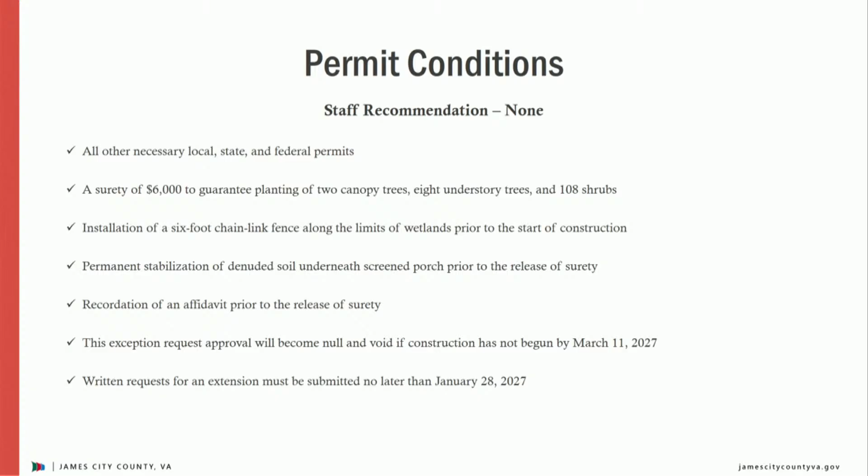Questions for staff? Show a particular slide with the floodplain. Completely in it, right? Or adjacent properties. Go one slide back.

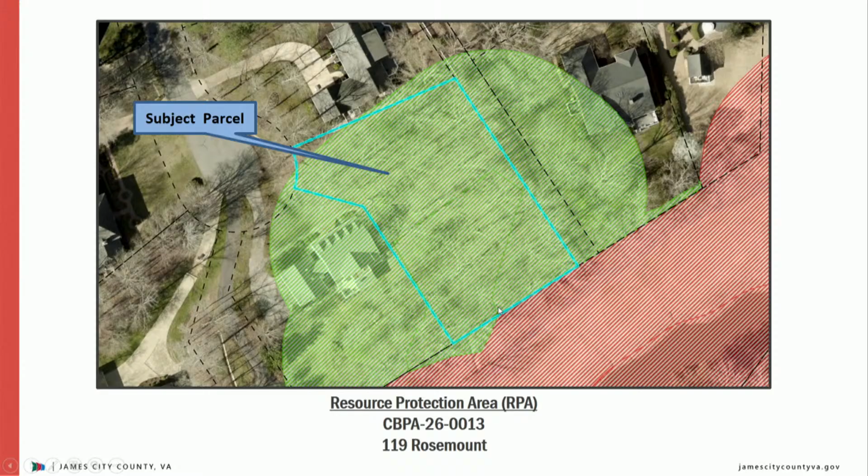Help me delineate the wetland area. Oh, I see it in the green line. There's a very faint green line that matches what's on the site plan, how it kind of goes a little straight, cuts off right about here, and then goes back down. Things being kept up to the direction north. Thank you.

Done. I'll open the public hearing. Mr. Grog? We're not done, sorry.

Good evening, Mr. Chairman, members of the board. Chase Grog with Land Tech Resources, 205 Bulifants Boulevard, Suite E, Williamsburg, Virginia.

Thank you, Ms. Grogine, for the staff overview of the project. Also with me this evening are Mr. and Mrs. Sherry, who are the potential purchasers of this lot and would be constructing the proposed home. The current owner, Mr. Warren, is here as well.

This parcel was platted in 1985 prior to the adoption of the Chesapeake Bay Preservation Ordinance, and like many of the remaining lots in Ford's Colony, it presents environmental constraints. The lot is 0.573 acres in size, and approximately 98% of the property lies within the resource protection area, which makes developing the parcel while protecting water quality the goal of this application.

With those constraints in mind, we worked carefully with the homeowner, the designer, and Ford's Colony to ensure the layout presented to the board represents the minimum necessary to afford relief while still allowing reasonable use of the property as a single-family home. The square footage for the proposed home has been designed within the limits of this section of Ford's Colony. I have also already attended a conceptual review meeting with Ford's Colony, and this layout has received preliminary approval from them as well.

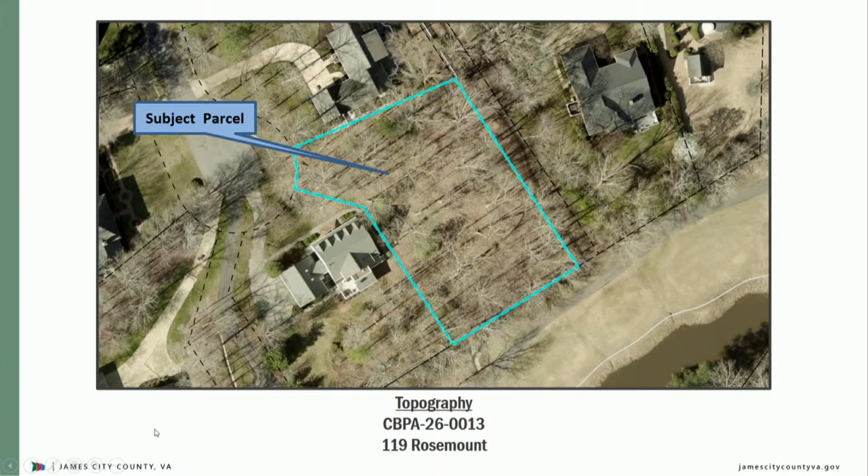In the middle of our lot is where those wetlands are. There's an old logging road that runs through there. So this is just a patch of wetlands that most likely, when the golf course was created, was raised and it just got kind of left on the inside there. Let's go to my site plan after.

Orienting you again, that concrete ditch is in this back area. That's the main channel from Ford's Colony. So the goal of this site plan was to get this drainage to go into a swale in the front, and you'll have an A-frame roof. So this roof drainage would come in the front and then go into that channel and around. You would have a portion of this landing, as well as the back of the house, that would filter through the wetlands basically. But it's in essence just a pocket of wetlands, because on the back of our property, it hits the concrete, goes under the golf course and into a BMP. Does that cover it? Yes.

Mr. Grog, what's the square footage of the proposed residence? Square footage of the proposed residence, as staff mentioned, is just over 1,500 square feet. It doesn't include the garage. Seems significantly smaller than the adjacent properties, is that? Yeah, for this particular one, since we were right in line with those guidelines for Ford's Colony, I know in the past I've gone through to compare square footages for reasonable comparison, but since we were right in line with that, I wasn't overly concerned with it in this particular instance.

But I would agree, since we're there, most likely everything around us is only bigger. Is the oak trees pre-existing in the wetlands, or are they part of the mitigation plan? Everything on this page that you're looking at are existing trees. So yeah, basically the whole back half of the lot will remain vegetated.

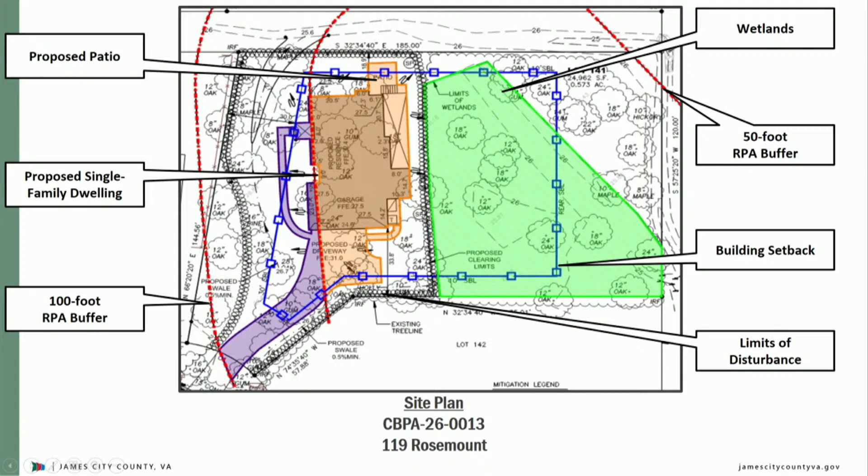Mr. Grog, do you have concerns for the trees along that temporary fence line? There's the 12-inch oak there. This 12-inch oak will probably remain, and these three will come out. We'll obviously be walking a fine line since the jurisdiction changes at those wetlands. So I don't believe those trees will have to be pushed over with an excavator, most likely they'll be climbed and limbed down.

How about the one over here in the corner? Down here? Right, yes. My guess is because we're not doing any grading over here, this tree would just remain. It's far enough away from the house so it could remain.

Same thing up in the front here. As discussed, I've been looking at this lot, probably about 3 years now, 2 or 3 years. At one point, one of the things we explored was bringing in about 2 to 3 feet of fill on this lot and doing a LOMA through FEMA to bring it out of the flood zone. That would have resulted in impacts to the actual wetlands.

So when we started working with this current client, we were able to come up with a nice, not very deep house fitted in there with the orientation and setbacks we have. But that did allow us to keep a patch of trees also in the front, so it's going to be kind of tucked in within the woods. It's technically going to be in the floodplain, so it'll have to be constructed to current standards for FEMA.

So the finished floor for this particular house right now is proposed up at 32.4, so it'll be about 5 feet in the air above the current grade. The county requires a 2-foot freeboard, so the floor joists from the home have to be at least 31. So it'll be up at 32. Correct, sorry.